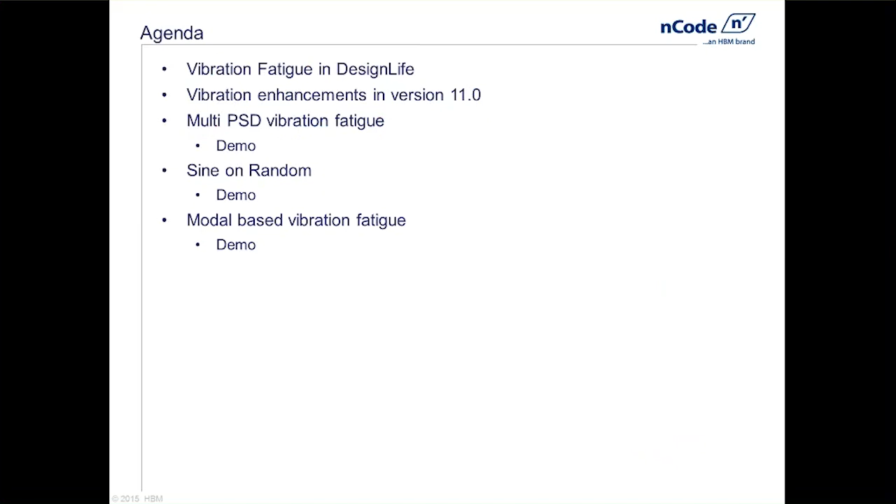The agenda today goes as follows. We're going to take a brief look into some of the functionality that we've had available to us in DesignLife up until version 11. Then we'll look at some of the enhancements in this year's version, including the ability to do multiple PSD vibration fatigue, which will include a demonstration. We'll talk a little about some of the features in Sine on Random, and then lastly do a section on modal-based vibration fatigue, also followed by a demonstration, wrapping things up with a conclusion at the end.

Just to recap, for those of you who may not be as familiar with vibration fatigue products in DesignLife, what it essentially does is allow you to simulate a vibration fatigue test. This can be driven by random PSD or swept sine loading, which are pretty common types of loading, or ways to describe our loading. The finite element model will be represented with a frequency response function.

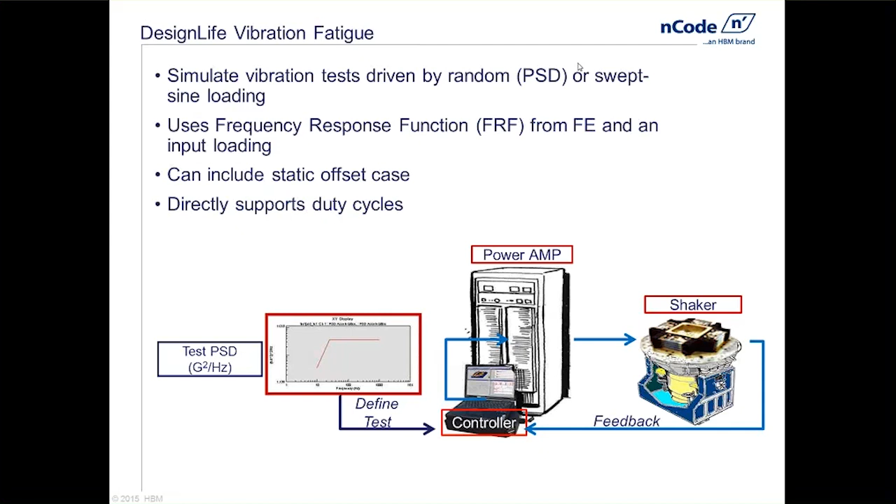We have a couple of options where we're able to include a static offset. This might be something simulating bolt tightening, assembly loads, gravitational effects, and those would then be superimposed on top of the cyclic loads, which are caused by the vibrations.

We also have the ability to build duty cycles, so we can have essentially multiple events describing different types of vibration events that would then happen sequentially, and we can put repeats on any of those events inside the duty cycle to describe the duration of each one of those individual events.

As you can see on the screen, in the middle we have a box which essentially represents what DesignLife is going to do virtually in terms of a virtual shaker table. We're going to provide at a minimum three inputs. Those main inputs are going to be the frequency response that you've solved for in FE. We accept a wide range of different solutions from FE codes.

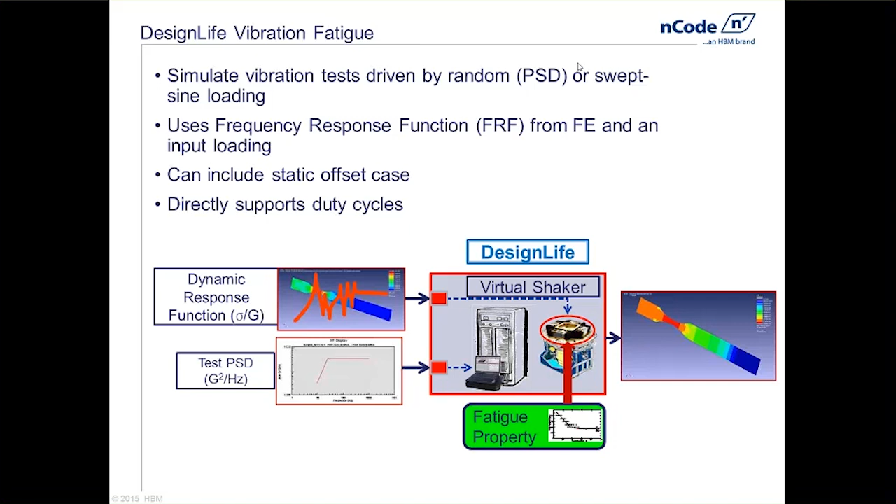You're going to be describing the loading environment. In this particular screen capture, we've got a PSD, which would oftentimes be in units of G squared per hertz or something fairly similar. And then we're going to describe the fatigue properties, in this case being a stress life-based model. From that, we'll be able to generate damage results as well as some statistical results from the vibration fatigue analysis.

So some new things in version 11. Let's take a look at these. We have quite a few new loading methods, including multiple PSDs, sine on random, and sine-dwell. We've also added functionality where we can do modal superposition in the frequency domain.

This can have huge benefits when dealing with very large models. We can much more efficiently manage modal stresses and then the modal participations, many times taking far less disk space than if we had done the frequency response function entirely in FE, solving from many frequencies. We also now have the ability to do isothermal analysis.

So in addition to being able to add static offsets, and these, by the way, are now scalable, we can also add scalable temperature load cases. So if you have material properties with different fatigue properties described at different temperatures, and a scenario with thermal conditions, we can take that into account and apply the appropriate material properties.

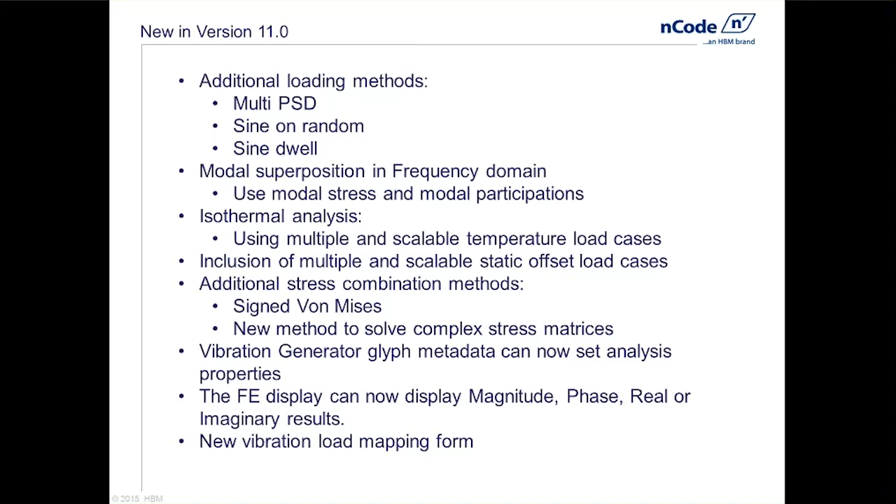In the FE display glyph, we can now display magnitude, phase, real, and imaginary results. We also have a new interface for the load mapping, which we'll see in just a bit. So let's take a look first at the multi-PSDs.

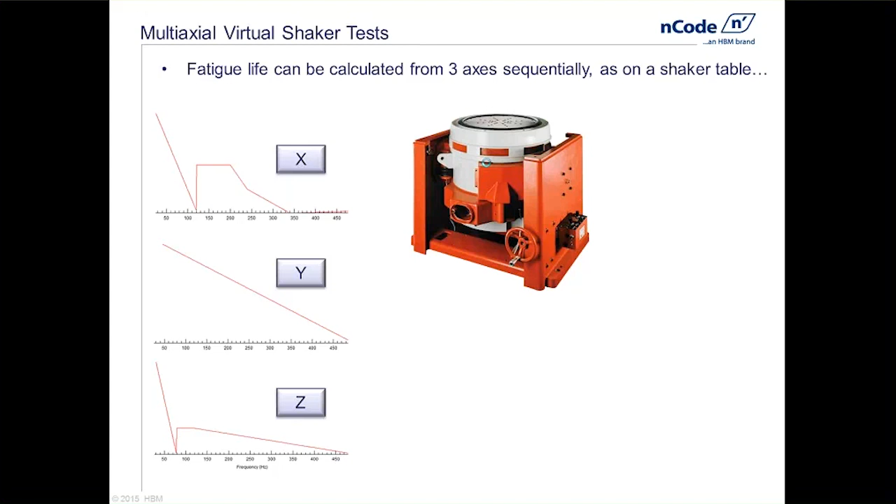For multi-PSDs, it says 3 axes sequentially here, but it doesn't have to be 3. It really just means more than one. In the past, the capability we had available, if we wanted to do multiple axes, was to do them sequentially, essentially one at a time, building a duty cycle that would excite, in this example, the X, then the Y, then the Z. This is really just what a single axis shaker table could do physically, where we might reposition the parts to address the different axes. What we now have is the capability of exciting all 3 of these axes simultaneously.

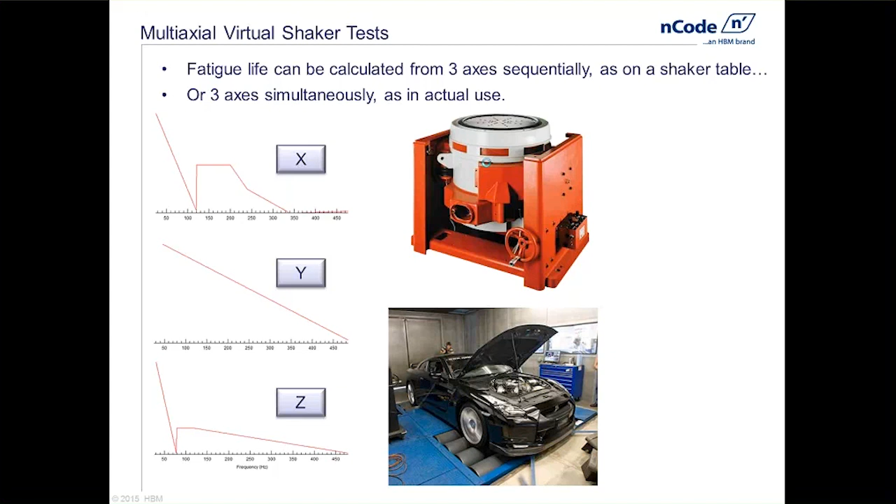This would be more realistic in terms of what a part might see out in application or in the field. You can imagine, like in this screen capture, we might have some underhood components, some electronics, mounted on a bracket on or near the engine. That's going to be excited in all 3 directions simultaneously, not sequentially, and having the capability to do this virtually is going to be far more realistic in describing the type of durability issues that component might have out in the real world.

So let's talk a little bit about what is in the load history. If we start first with some time series data, we have 4 main characteristics in that time signal. The first is amplitude, and this is very critical for doing any kind of fatigue analysis. It's essentially what allows you to describe how big a stress cycle or load cycle is going to be, which ultimately translates into some type of damage result.

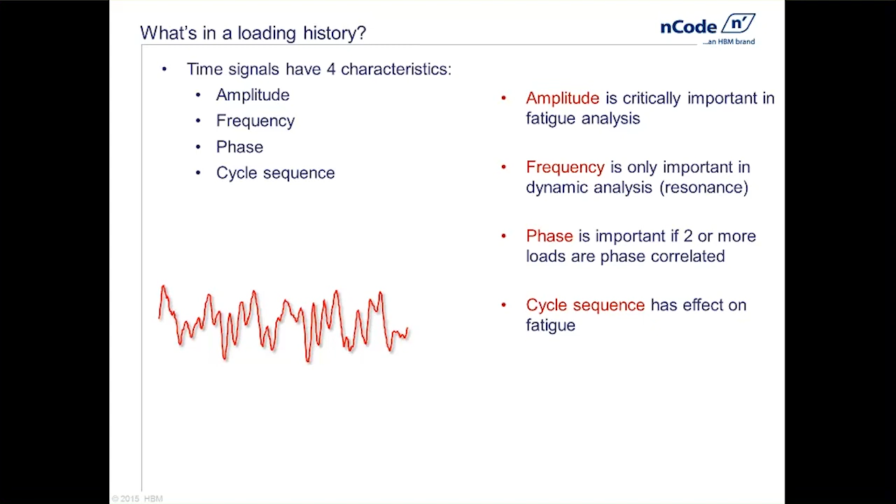We have frequency as a characteristic as well, and this one is interesting in that it's only important in dynamic analysis when we have a structure that we expect is going to resonate because of the vibration loads being applied to it. We have phase, which really only becomes important if we have more than one load. If we just have a single load, we don't have to describe how it relates to other things, so phase isn't as big an issue, but getting into multi-PSDs it becomes very important. And lastly we have cycle sequence, which can have an effect on fatigue.

So when we convert time series data to the frequency domain, we often make use of a Fourier transform, where we can describe a time signal with a series of sine waves. In this example, it's fairly discrete, where we've taken a time history and represented it with just a series of 4 sine waves, each having a unique amplitude and a unique frequency.

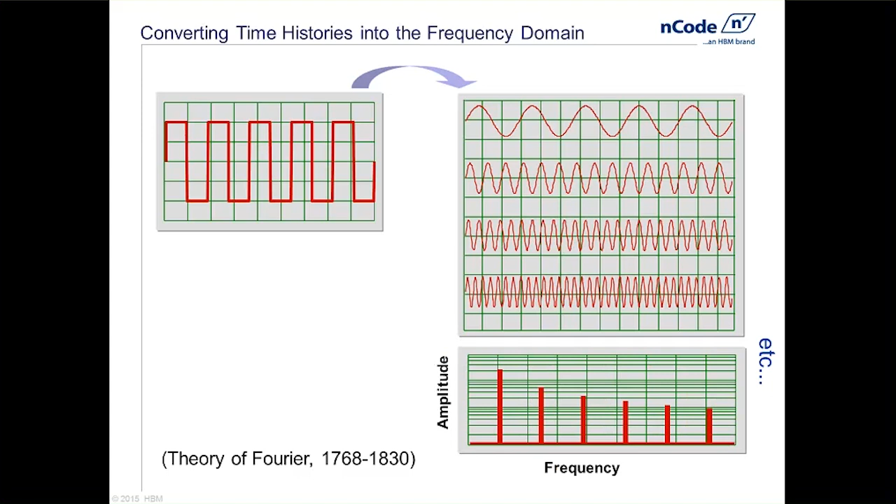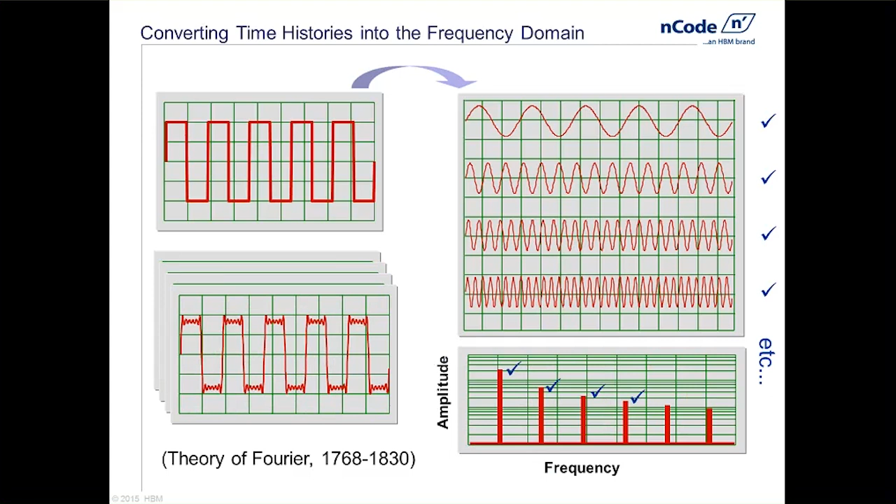Often we plot that on a chart that would allow us to display amplitude or power versus frequency. Perhaps we can reconstruct that time series data if need be from the information described in the PSD, overlaying more and more of these decomposed sine waves to get a pretty good approximation of the original time series data. As a reminder, this works really well, and this is all we need to do if we have a single load case or a single load PSD.

It becomes a bit more complicated when we have multiple events, and we're going to see a couple of examples here where this importance really starts to show.

If we look at a simple example of a couple of flags on a flagpole, both fairly close to one another, fairly high up on the flagpole, we might say the events - being wind conditions on each flag - could be fully correlated if they really are seeing the same type of conditions. If we look at the second example, where we have two flags again but one has been lowered, it might be that the lower one is starting to get into the boundary layer caused by wind conditions closer to the ground. That event is going to start to look a bit more different than the event closer to the top of the flagpole, and now we're getting into a scenario where we don't have complete correlation between those events.

We would say that they're partially correlated, or there's definitely some similarity between the time signals, but they're not exactly alike.

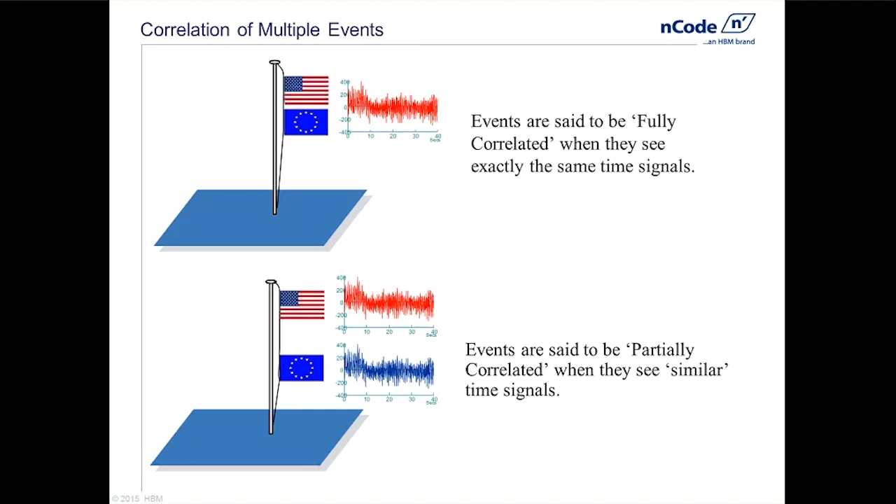We can look at it another way as well. If we have two flags on two separate flagpoles spaced some distance apart, they would be partially correlated, primarily because there'd be some type of a phase shift. You have some event that occurs on the leftmost flagpole, and then moments later that same event occurs on the next flagpole.

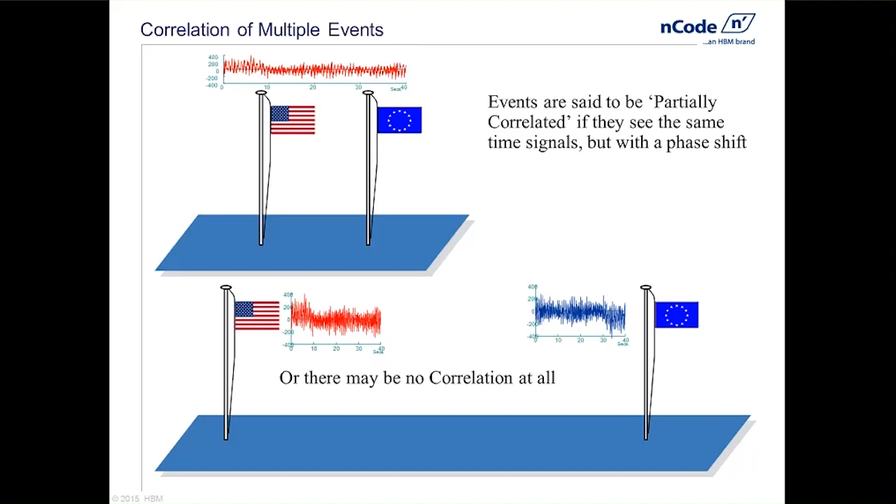Or we could have no correlation at all. If we've spaced those two flagpoles far enough apart, or if one of those was much lower on the second flagpole, the time histories that we're going to see are going to be completely different. And we need to be able to describe how well these correlate. That's what we're going to be seeing in this next particular slide.

So just to recap, if we are fortunate enough where we only have one load PSD, what we can do is, if we are starting with time series data, do a Fourier transform, describe our loading in terms of something like g squared per hertz, and we can see we've got a sample plot right here. We're going to apply this load PSD to our frequency response function, one that we've solved for in FE with unit excitation across all frequencies.

By applying this load PSD to the frequency response function here, we can generate a local response PSD for each element on that structure. So now we end up getting a plot for each element that is going to be some type of stress PSD. We're going to have stress as a function of frequency, and then we can make use of counting algorithms such as Lalanne or Dirlik to determine the cyclic content within this stress PSD, and then we can use Miner's rule to determine how much damage is caused.

Now, if we have two loads, or two load PSDs, there is going to be a relationship between these two. How well are they correlating? Kind of like what we saw in those previous slides. To describe this correlation, we also need to have a cross spectra and phase. This is going to help us to determine at a given frequency how much is one load PSD being excited and how much is the other one in terms of gain with respect to that one, and what is the phase? Are they together, or is there a little bit of a lag?

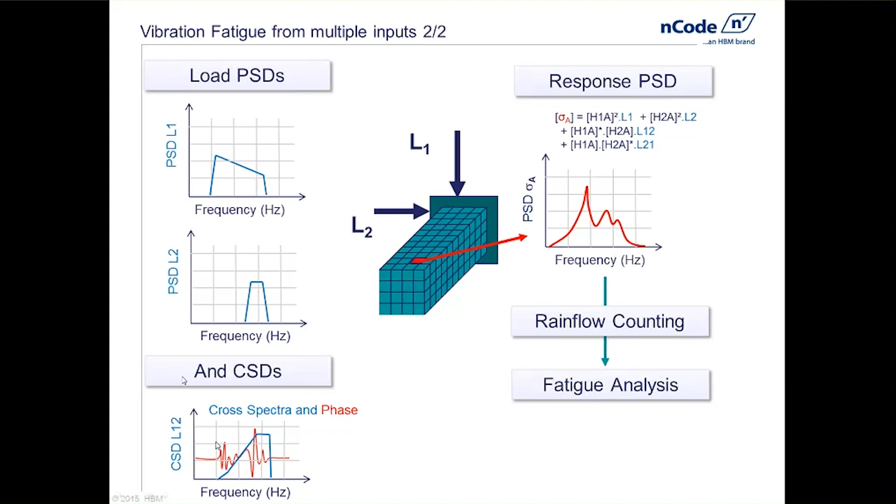With these two load PSDs and the cross spectra, we can come up with a stress PSD on each of the elements in the frequency response function. And once we have this stress PSD, again, it's just going to be a matter of using a cycle counting algorithm to determine the cyclic content here, and we can do our fatigue calculations. But the complexity definitely is in combining these multiple load PSDs together.

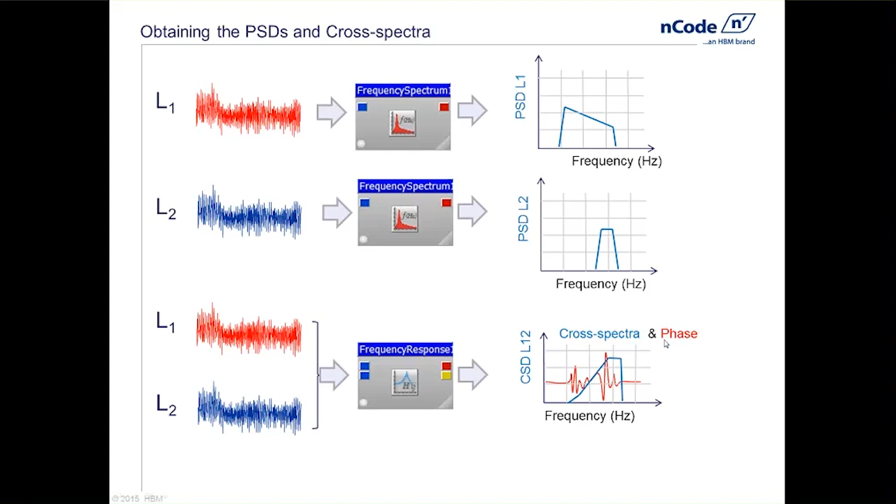Within nCode, the PSDs can be easily created with a frequency spectrum glyph. We can see that right here, and we're going to see a demonstration of this in just a moment. And the frequency response glyph right here is what will allow us to create the cross spectra and the phase plots. So let me go ahead and open up nCode for you.

What I'm going to do is open up a standard flow. This is something that's going to be available to all users. And what it will do is create the PSDs necessary, as well as the cross spectra with phase. It creates one more file, which really serves as a lookup file. It's a text-based file, fairly easy to read. That becomes really helpful. It's a nice user feature when we get ready to do fatigue calculations in design life with these PSDs and these cross spectrums.

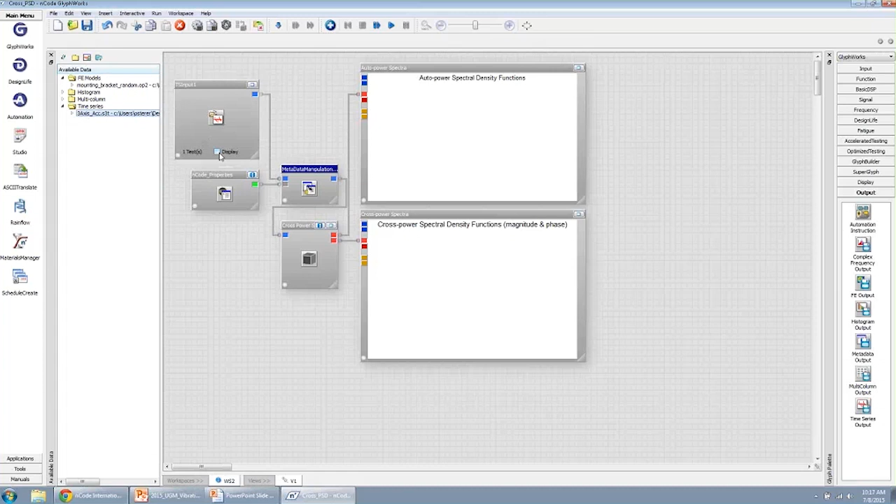Let me go ahead and open up this first process right here. It's called cross PSD. And what I will do is take my time series data, drag it into this time series input glyph. It's going to be one of the inputs required. This particular glyph right here, this is just going to allow me to specify the number of bins in my frequency analysis. And we want to make sure that that's consistent across my PSDs as well as my cross spectras.

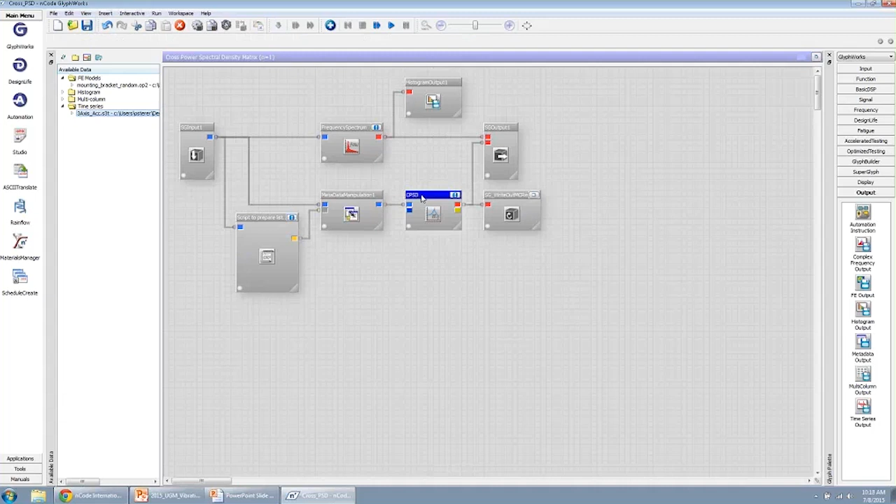If I go ahead and maximize this particular glyph right here, it's a super glyph. You'll see that within it, it contains a frequency spectrum glyph, and it also contains a CPSD glyph. Both of those will be generating the necessary plots in the frequency domain that we need to perform a fatigue analysis on an FE model with multiple load PSDs.

So let me go ahead and just hit the run button here. We'll take a quick look at the plots and then resume back into our PowerPoint presentation. So here we have the very first XY display.

This is just showing us our PSDs in each of the 3 directions. We could use each one of these alone by itself if we were trying to do a single axis shaker table where we're looking at them sequentially.

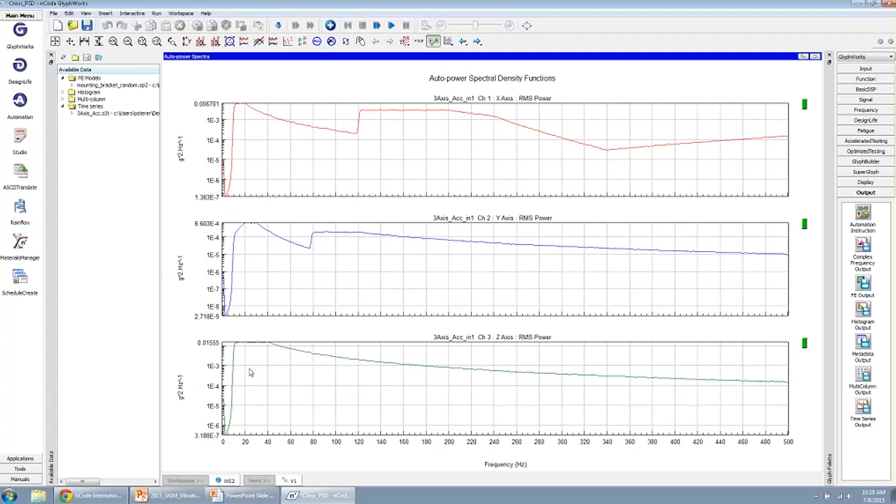But because we've used this particular process, down below right here, we also have the cross spectrum and the phase of channel 1 versus 2. And I can index through some of these as well. We can see how channel 1 and 3 relate. And we have channels 2 and 1, channels 2 and 3, and then channels 3 and 1. So we have all of the cross spectra and the phase as well.

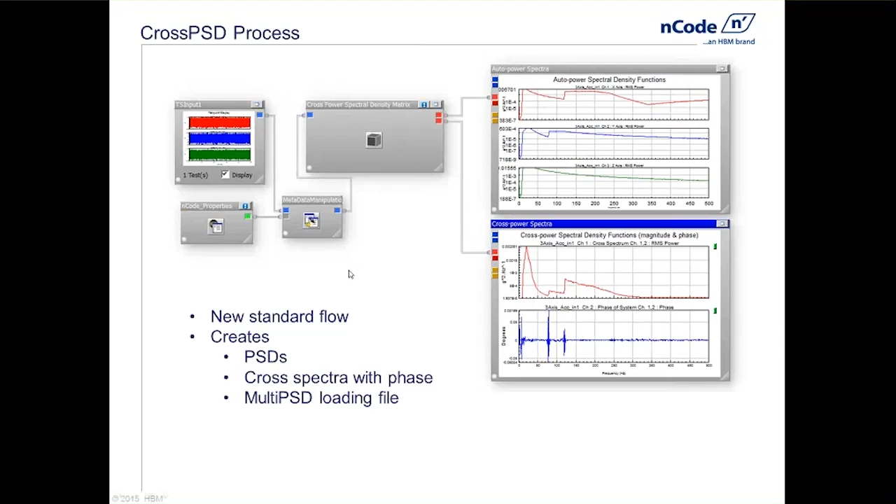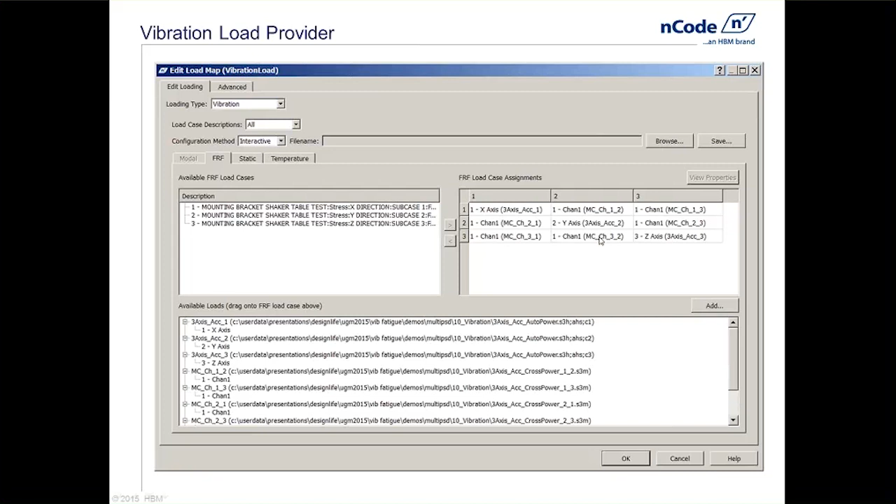The XML file, or that text file that gets generated, if I browse with this button right here, I can actually navigate directly to that particular text file that was automatically generated in the previous process, and it would automatically populate all the correct plots in this square matrix. So you as a user are not required to drag and drop each individual one here. You can simply select that one file and it would auto-populate the matrix for you.

So at this point, what I'd like to do is jump back into nCode and just give you a brief demo of the remainder of this vibration fatigue for multiple inputs. And to do that, I'm going to open up one more process. That is this one right here. It's already set up for me.

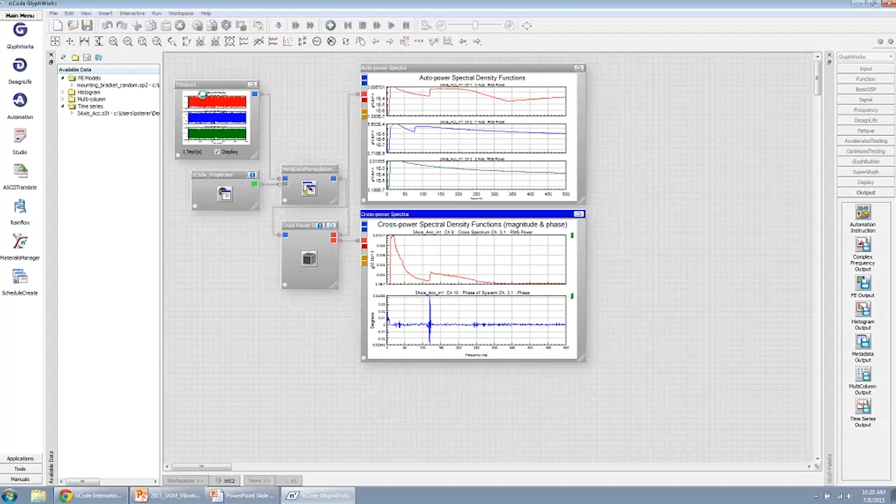And what I need to do is grab my FE results. If I show you just a few of the results in this particular results file, underneath this drop-down menu, under the properties, you'll see that for subcase 1, and that's the X direction, we have solutions in 10 Hertz increments, starting at 10 Hertz, and if I scroll down slowly here, you'll see that we go all the way up to 500 Hertz.

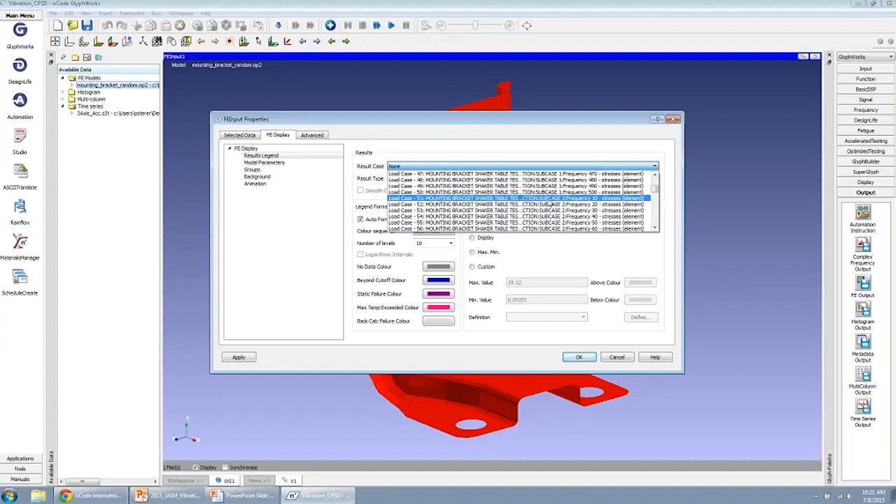We then start up with subcase 2, which is the Y direction, again 10 Hertz increments, and that would then be followed with subcase 3, which would be the Z direction. So we've got a solution for many frequencies in each of the three directions.

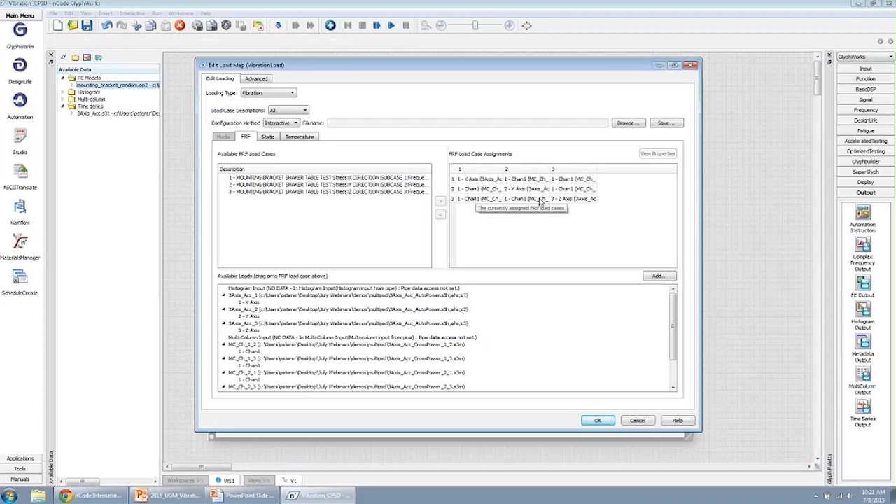If I go into the load mapper, just to show you guys what this looks like, you can see that we have already populated this square matrix of all of our assignments. The browse button right here, if I click on that one, you can see this is that text file that would automatically build that matrix for me. It has however, already been selected, so there's really no need to define that one more time.

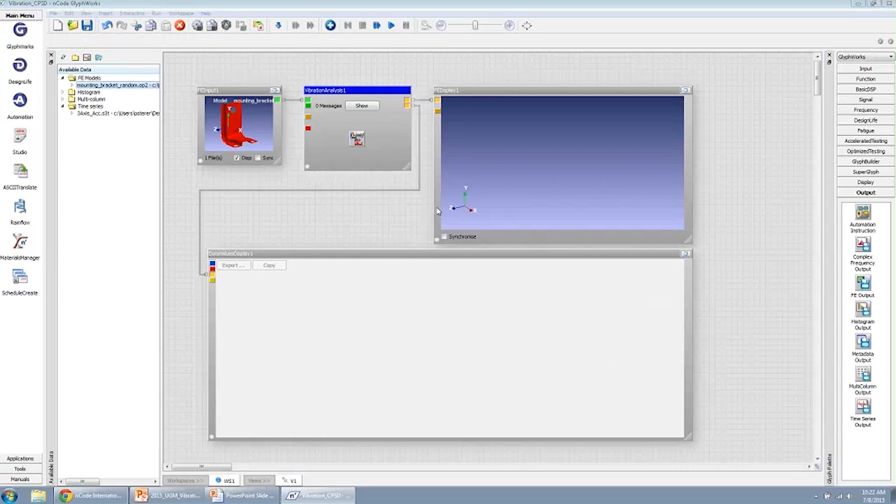And just to make sure that we have assigned a material to it, we'll take a look, and we have in fact just assigned a generic aluminum alloy to this particular bracket. So we are in fact ready to run it, and by clicking on the run button, we'll do a stress translation, and then count up cycles for all of the entities in my bracket, and then output some damage results.

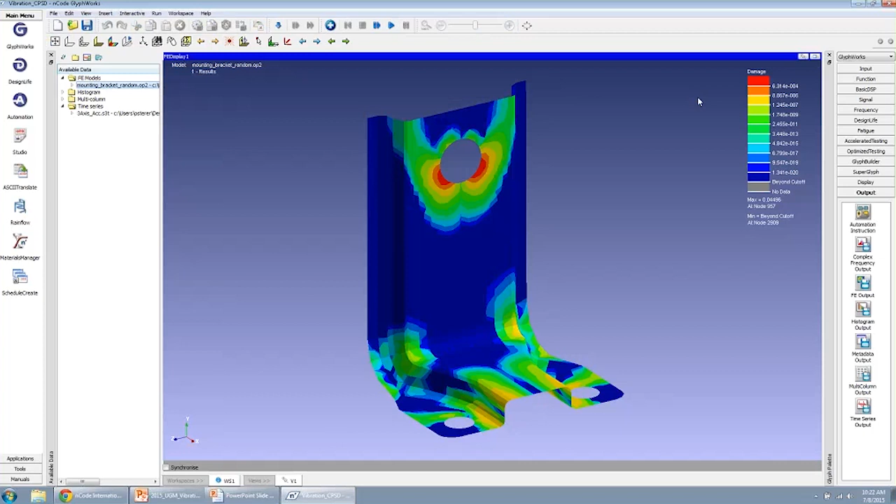So this right here, if I enlarge the FE display glyph, we can now see a damage contour plot. That same information is also being displayed in tabular format in this display glyph down here as well, in our data value display. We have in fact added some additional columns to the results that we can look at.

Some of them might be a bit easier to look at in tabular format. But if I scroll a little to the right, we will notice right away that we have columns for all of our spectral moments. These are some of the numerical values used to determine the cyclic content with some of the counting methods. And we have a little bit further down here, life in the very last column. So quite a number of different statistical results that get outputted when doing vibration fatigue, because the counting methods are assuming some type of a statistical distribution of cycle sizes.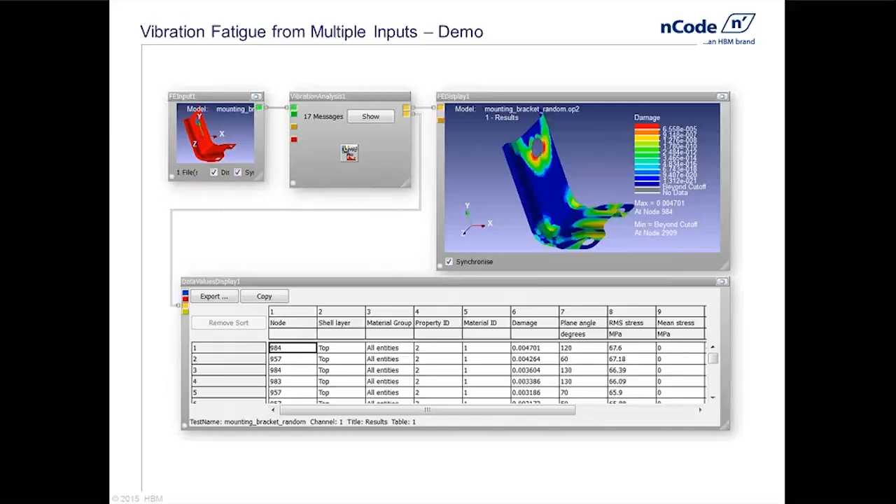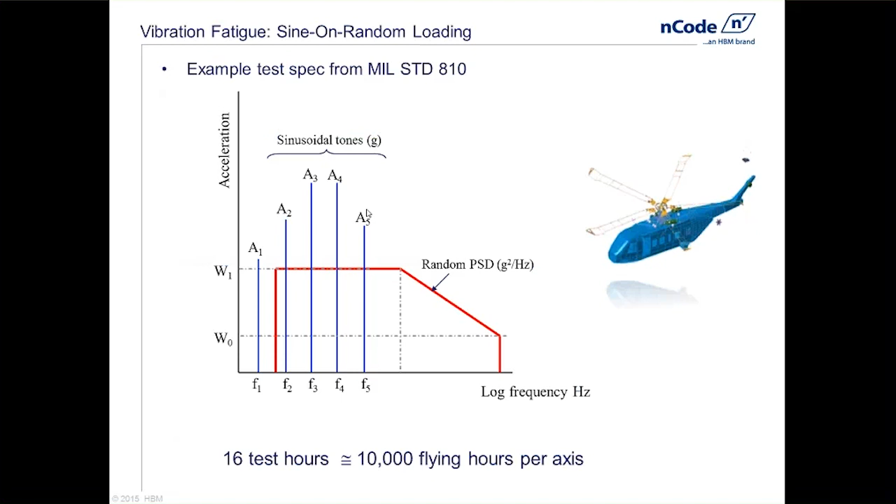All right, let's go ahead and go back into the PowerPoint presentation, go to the next section. The next section is sine on random. And what we've really done here is introduced a new way in which we can describe the loading. In this case, the loading is going to be some type of a random PSD. We can see that in red right here, overlaid with one or multiple sine tones. An example of this would be like the MIL Standard 810 handbook with a sine on random loading.

We have a couple of assumptions that we should take into consideration when doing sine on random. The first one is that the stress response must be narrow band. And just to be clear, this isn't the load PSD, whether it's narrow band or broadband, but the actual local stress response on your structure. So if you're looking at a particular element, what is the stress response of that particular element in the frequency domain? Is it narrow band? If it is not narrow band, if it's broadband, and we're making a narrow band assumption, we tend to make very conservative damage estimates. So if it's not narrow band, at least it's going in the right direction in terms of a conservative solution. The second bullet item is that the sine frequencies must be completely within the noise frequencies.

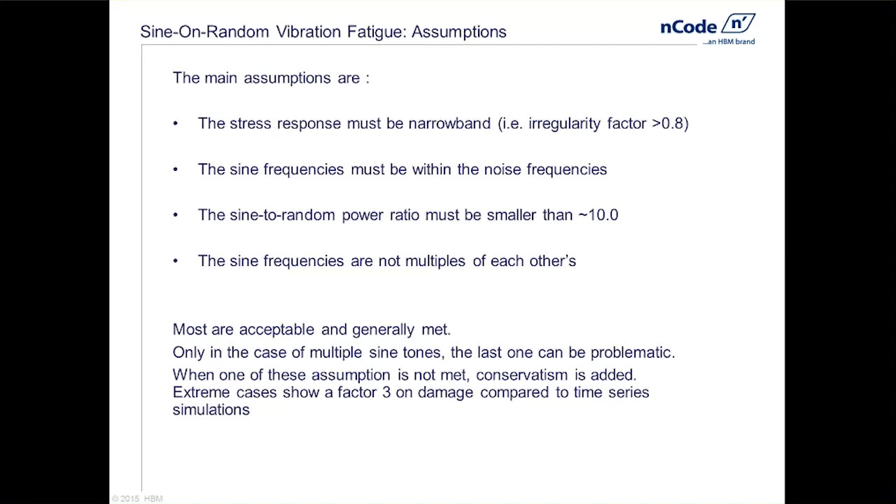And this one is usually something that the controllers prevent you from doing anyway, so it's often not a problem. The third bullet item is that the sine to random power ratio must be smaller than 10. If not, again, we're going to start to see some conservative damage estimates. And then lastly, in the event that we have multiple sine tones, the sine frequencies should not be multiples of each other.

So let's go ahead and go back into nCode. I'm going to navigate to a different directory to get some sample data for you guys. So let's go ahead and clear out my available data window and grab this particular directory here. And I have a sample process we can start with as well.

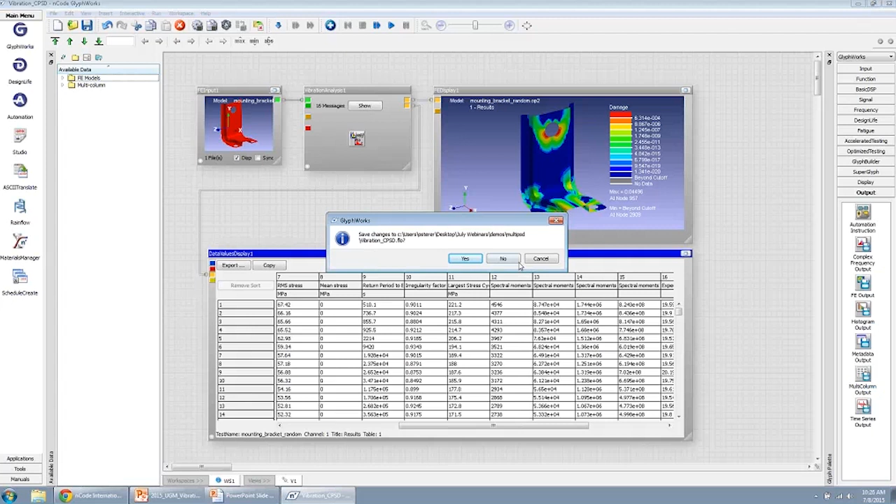All right, so in this particular process, what I'm going to do is grab my FE results. This again is a bracket, a little bit of a different bracket than what we saw in the previous example. I'm going to grab my PSD right here, drag it into this multi-column input glyph. This multi-column input glyph will be passing along the random bit of my excitation or my load into the vibration generator, and we can go ahead and take a look in here.

You can see here are the breakpoints from my multi-column input glyph. And if I go to this Advanced tab, you can see that we have described in metadata the sine tones that are to be overlaid. In this case, we only have one sine tone. It's going to be at 90 Hertz, and it has an amplitude of 0.2.

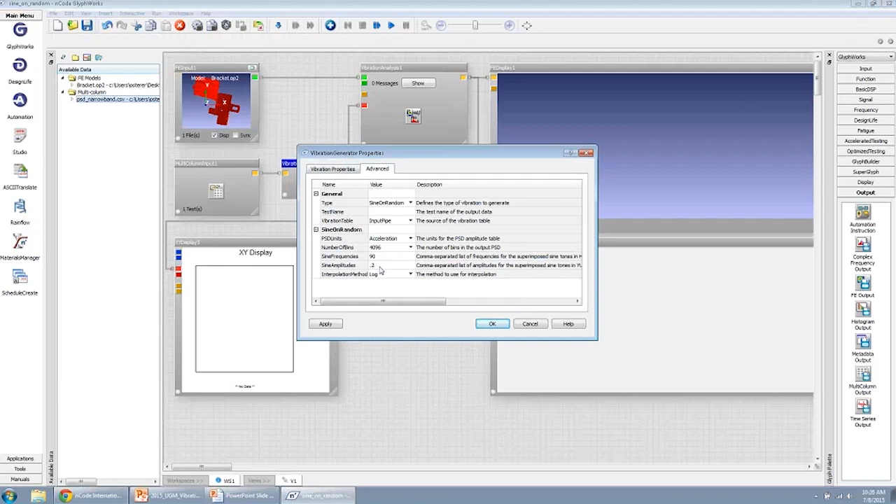So we will OK that, and if we just double-click on our glyph, go into material mapping, make sure that we have assigned a material to our structure. And we have. It has an aluminum alloy. That's good. We should be able to run the process.

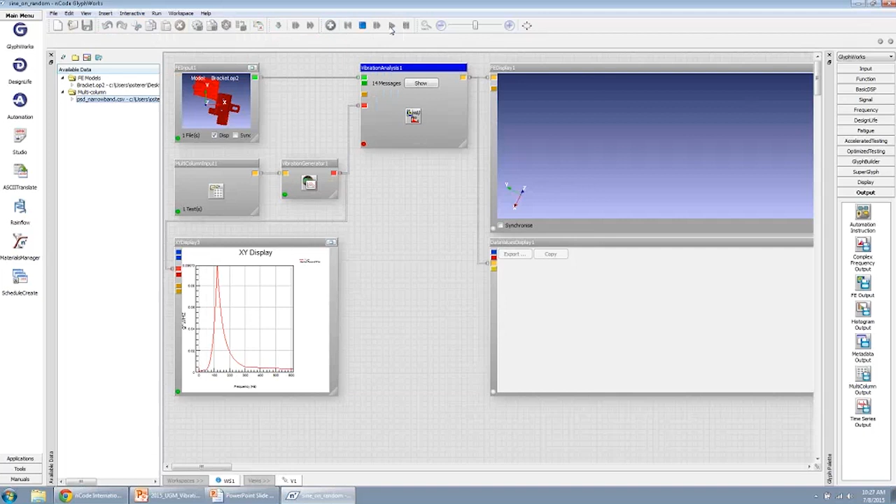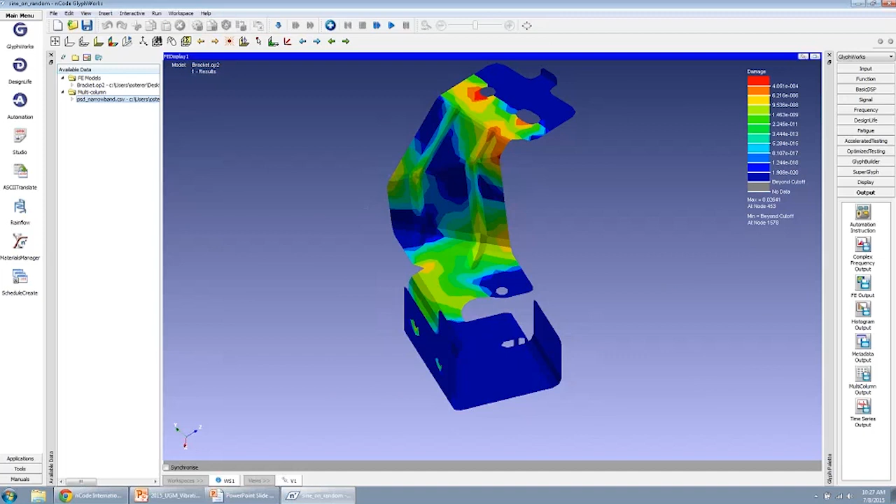And there we go. We now have a damage contour plot. If I scroll a little bit to the right, we can see that we have predicted some damage results on this particular bracket based on random excitations with one sine tone. And in addition to that, we can look at some tabular results.

And probably one of the newer columns in this one is the power ratio. So this is the power ratio of your sine tone to the random. And looking at some of these results and determining if that's less than 10 or not is going to tell you if you might expect some conservative results on a node-by-node basis.

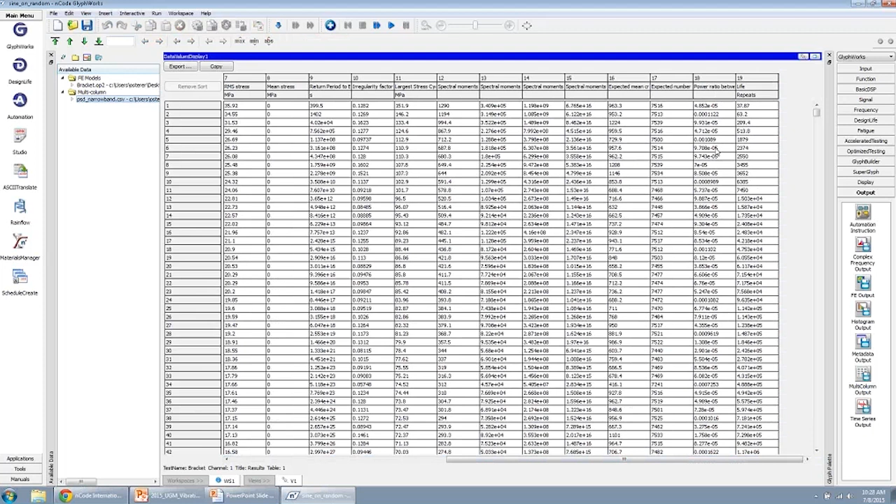All right, so that is the sine on random loading. Let's go ahead and go into the final section, which is modal superposition based on our frequency response function.

So just to graphically display what the inputs would be, if we're doing a fatigue analysis on a frequency response model prior to nCode 11, we needed to do a harmonic analysis in FE. And if you were doing this in Nastran, for example, you would have results in the form of an OP2 file representing your complex frequency response function.

And we would bring this particular results file into Design Life, applying a PSD to that if we had random excitations, and then determining the damage as a result of that. This could be a very large model.

A different way of doing this would be to do a modal analysis in FE. We could take the modal stresses, and then we could take the modal coordinates, which is going to be in the form of a PCH file, the combination of the two being much smaller in terms of disk space than the original approach, but describing the same types of things, and then allowing Design Life to essentially build the frequency response function. So we're going to do this inside of Design Life.

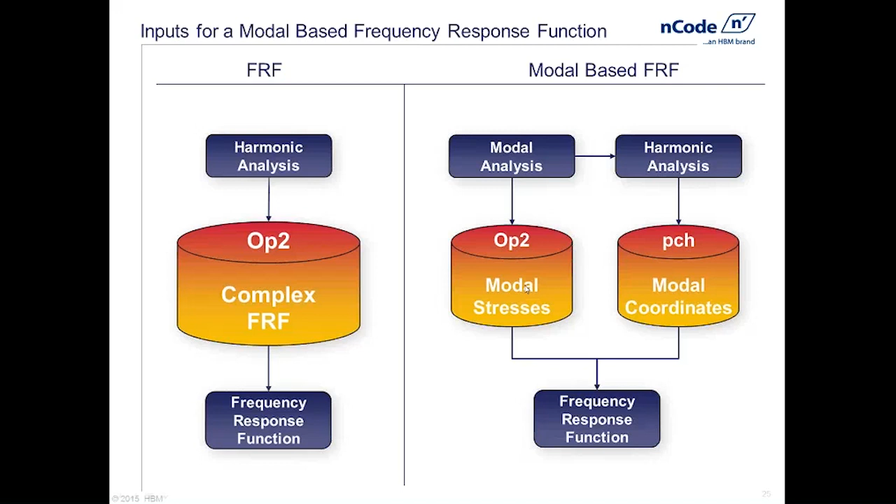And the example that I'm going to show you in a bit, the size of these two files combined is 1/20th the size of this particular example right here with the original approach.

Here you can see a table that describes the benefits of doing a modal-based frequency response function. If we looked at just one particular 2D element where we had 200 frequency steps and also 10 mode shapes, if we took the original approach, we have a real and an imaginary stress.

Each one of those stresses has 3 tensors. And for the first approach, we have 200 frequency steps, which gives us 1,200 stress results per element in that FE results file.

If we took a modal-based approach, again, we have 1 real and 1 imaginary stress component, 3 tensors each, but only 10 mode shapes, which gives us far fewer stress results per element that we need to address. And this is really what's going to allow us to dramatically reduce the file size of the FE results files, and also dramatically decrease the computation time of the analysis itself.

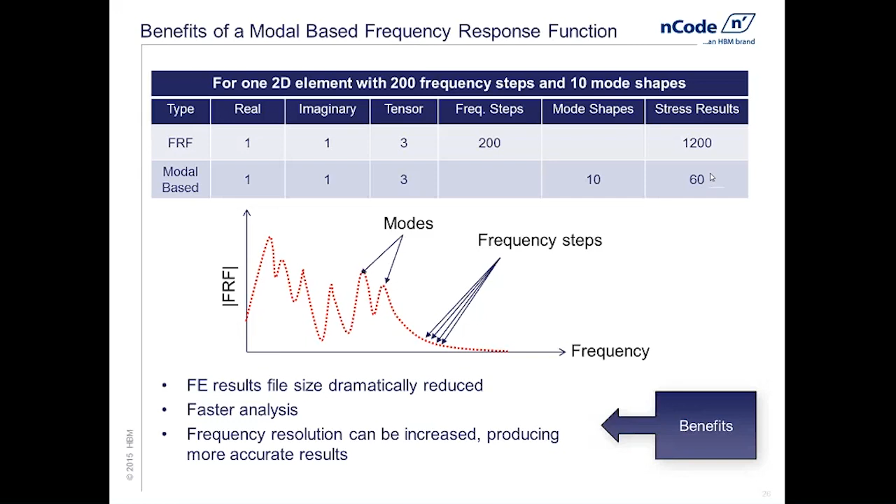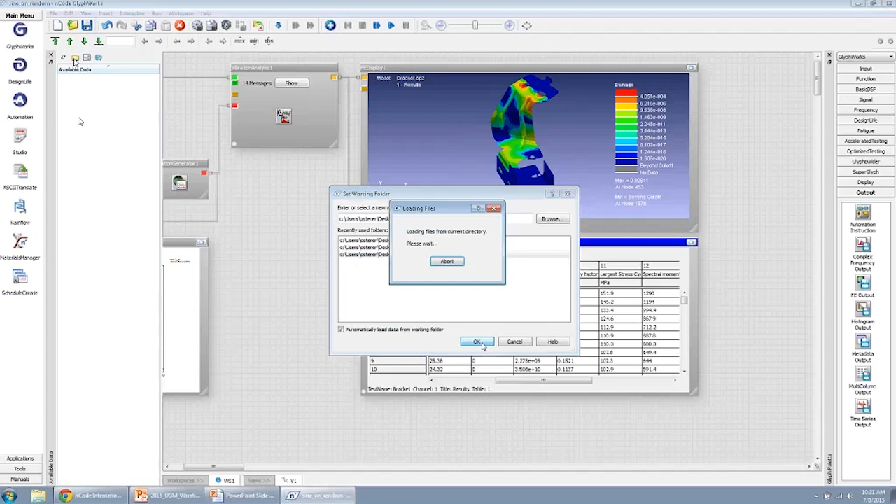So let's take a look here, let me go ahead and show you the process. And for this one, I'm actually going to navigate to a different directory for some sample data. But what I will do is build this particular process from scratch, just so that you can see some of the properties that are required, some of the things that we need to change as we build this particular analysis.

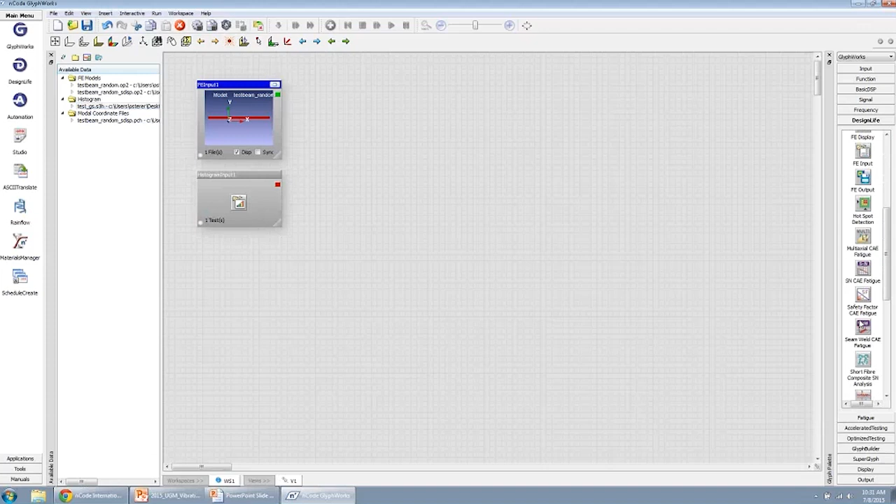So what I'm going to do is grab my modal stresses in the form of an OP2 file. I'm going to grab my PSD. This is in histogram format. And then my modal coordinates, so here's my PCH file. That actually needs to be dropped onto a modal coordinate input glyph.

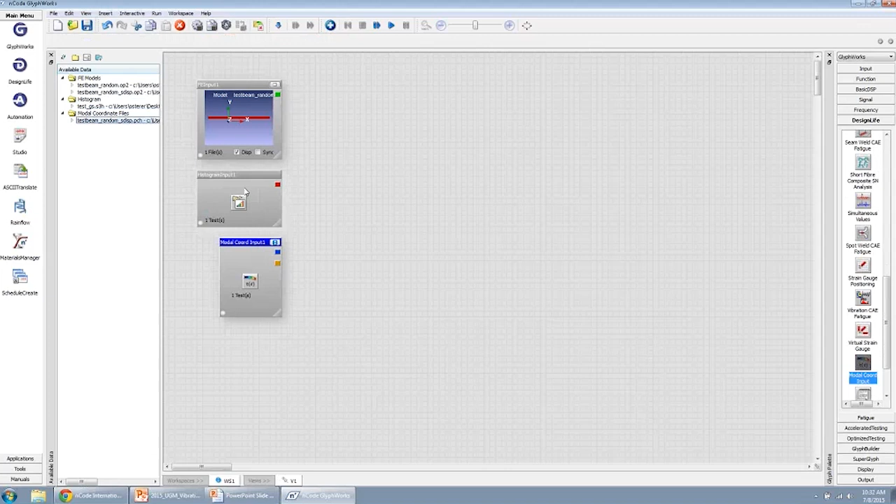So let's bring that out onto the workspace. There we go. So the PCH file and the OP2 file, those are both coming from FE, representing my modal stresses and my modal coordinates. And this particular histogram file, that may be something that you had created earlier in nCode, or perhaps somebody has supplied with you. We're going to combine all of those into our vibration analysis glyph.

So let me go ahead and attach some pipes here. And in this particular example, I'm going to make use of this red histogram pad for my PSD, and I'm going to make use of this multi-column pad for my modal coordinates.

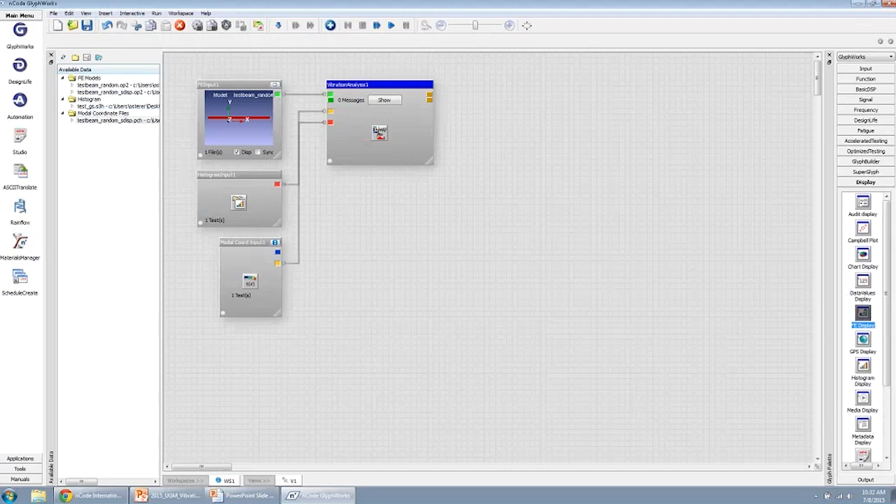We'll get one more display out onto, looks like I can get two displays out onto this workspace for you. We'll have some FE display results there, and we can also graphically display the histogram, the PSD, and we could also display the modal coordinates if we were interested in looking at some of those.

All right, so what I want to do, I'm going to go into something called Advanced Edit on the Vibration Analysis glyph. We will run the process up to this point.

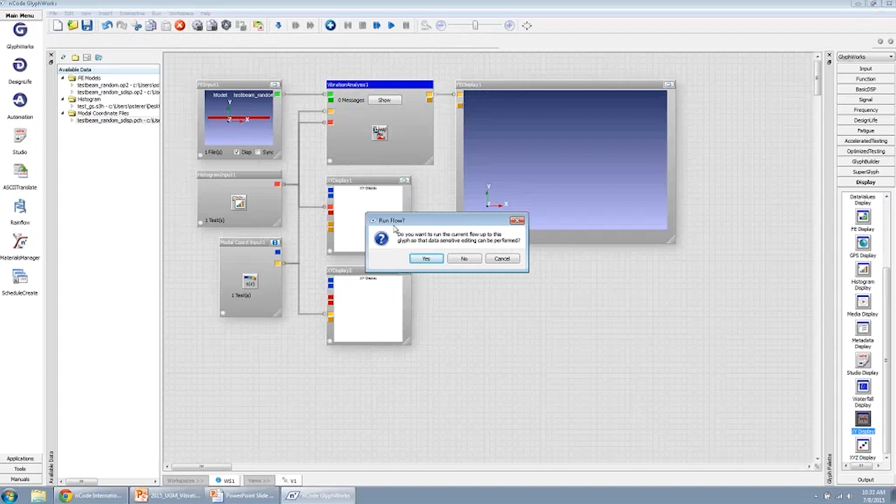And now what I'm going to do is go down my tree structure over on the left and define some of the properties that are required to be able to do vibration fatigue based on the modal stresses. The first thing that we need to do is inside of FE results, this is the area that essentially allows us to interpret how we're going to process the FE results.

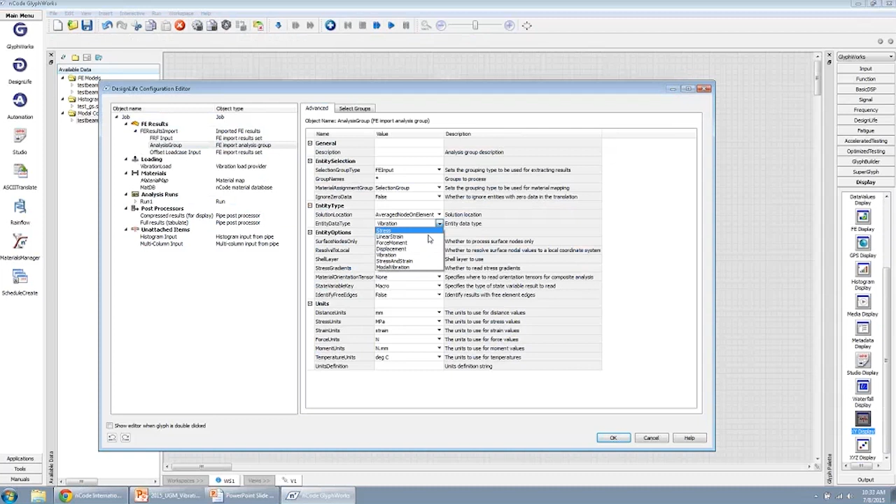I want to make sure that my entity data type is set to modal vibrations. This is the first thing that we need to ensure. That's going to allow us to grab those modal stresses.

The next thing that we'll do is describe how the vibrations will be described. And we first need to go to this Advanced tab. This Advanced tab is going to allow us to describe modal loading. That's by default set to false, but if I set it to true, it enables a tab right here called modal. So now we can see that my modal set is available.

I can select that one and move it to the right. And I can also take this piped in multi-column data, this is my PCH file, the modal coordinates, and assign it to my modal stresses.

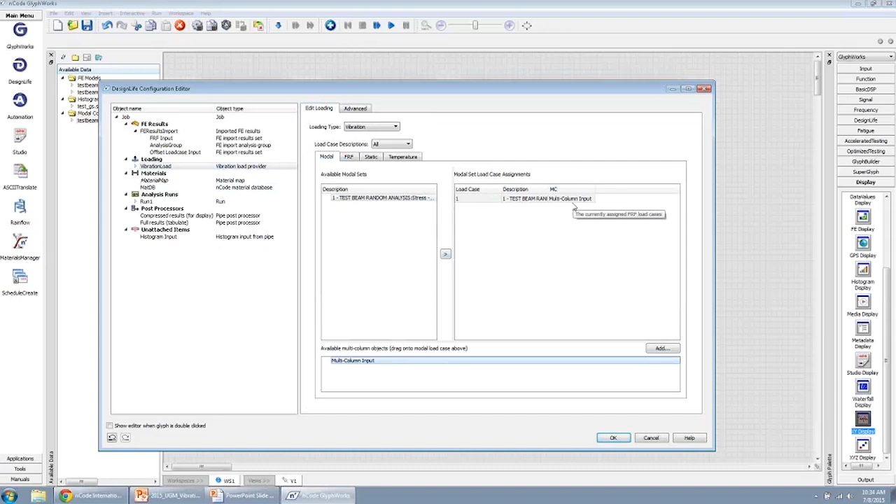By doing so, this is going to allow DesignLife to essentially build my frequency response function, which is going to be described in this tab here called FRF. I can now take that frequency response function that we're calculating, move that to the right, and I can drag my histogram on top of that. So here's my PSD, my random excitations described in histogram format.

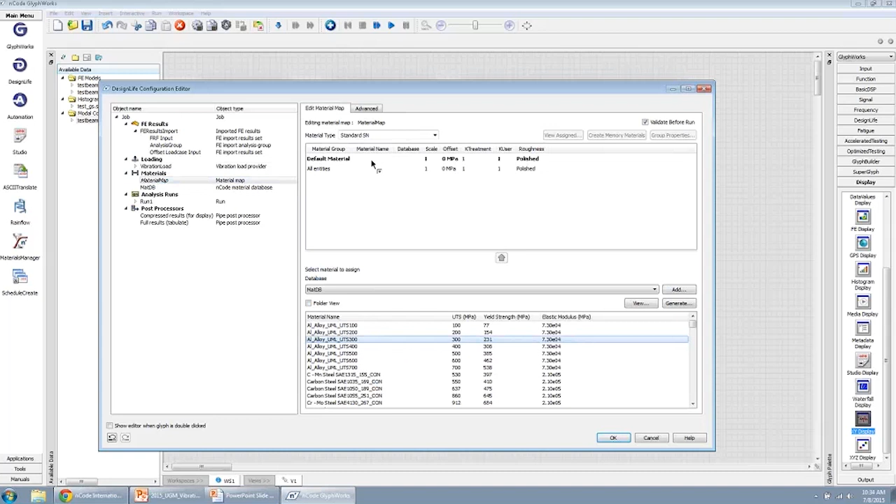We need to go a little bit further down and make sure that we have a material assigned. So we'll just grab a pretty standard material here. Let's try that one more time. There we go. And we should be ready to run our process.

So I'm going to OK all of those changes to my properties, select the Run button, and we are now performing fatigue calculations.

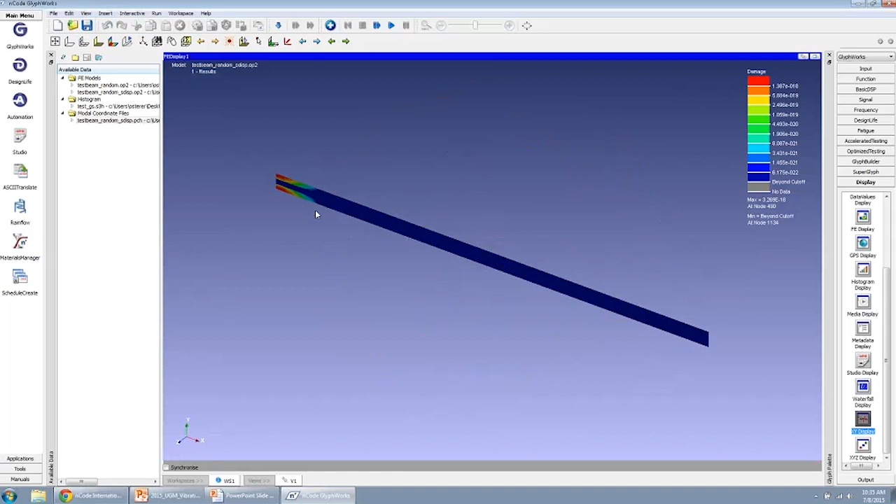So here is our damage plot. Very simple model in this particular example, but you can see that we've got a little bit of damage occurring in the upper left end of our structure.

If we look at the histogram in the first XY display glyph, perhaps we want to look at a log scale, and we can enlarge that. Here is the PSD in terms of G squared per hertz, going all the way up to 2000 hertz.

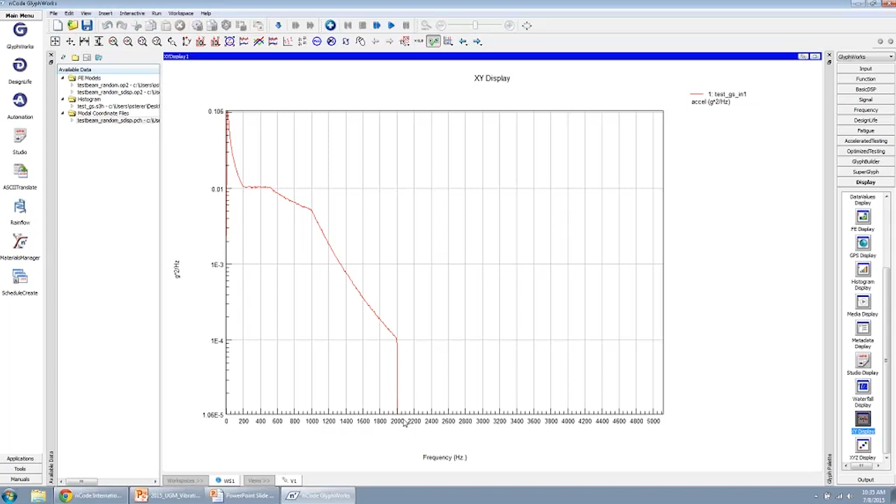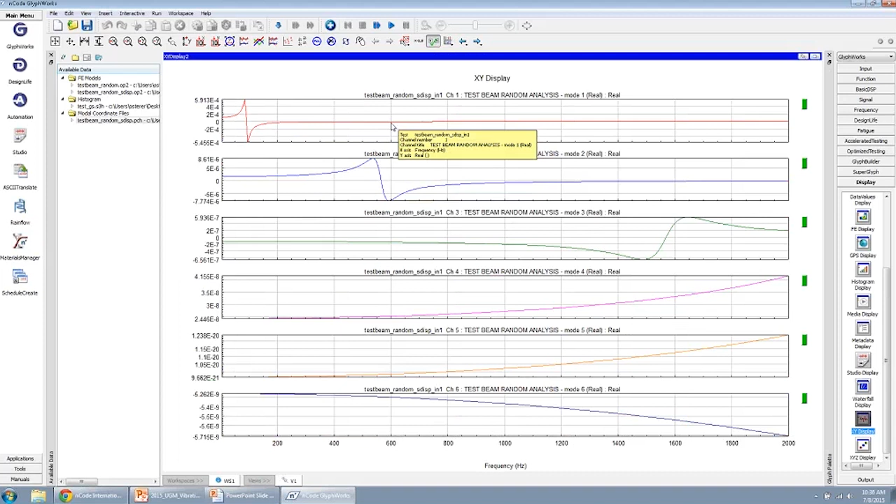And here are the first few of the modal coordinates. We're going to have a modal coordinate for each mode shape. And I believe we have 6 in this particular example, so we can set that to 6. So here are modal coordinates for the first, second, third, fourth, fifth, and sixth mode shapes with the real component. And there will also be 6 others for the imaginary component as well. So this information right here, combined with our modal stresses, is what allows us to essentially build that frequency response function in nCode.

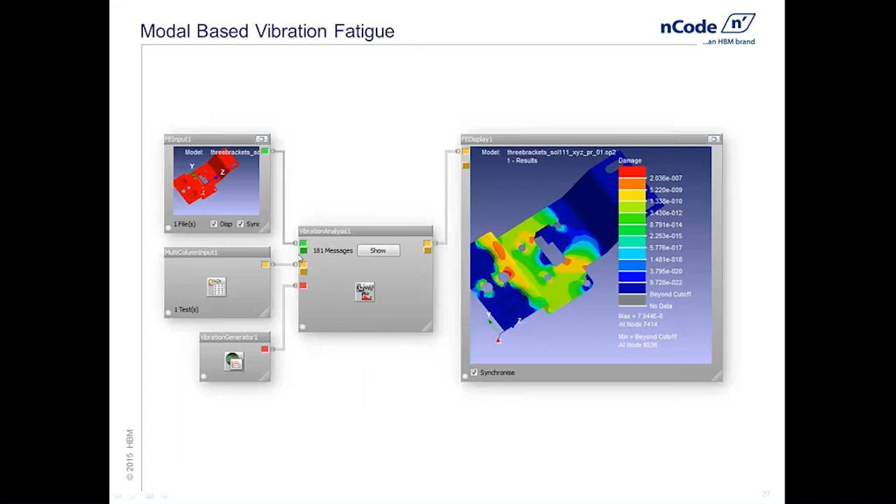All right, let's go ahead and jump back into our PowerPoint and make our way through the end of this section here. So just to kind of recap on our modal-based frequency response function, we started with modal stresses and also the modal coordinates.

Those were solved for in FE. We combined those in nCode. The modal coordinates, by the way, that particular glyph supports results from Abaqus, ANSYS, Nastran, and OptiStruct. And the big advantage here is that we are going to be dealing with much smaller files. In almost all cases, there are far fewer modes than we would typically have frequency steps, and that then translates into faster computation time.

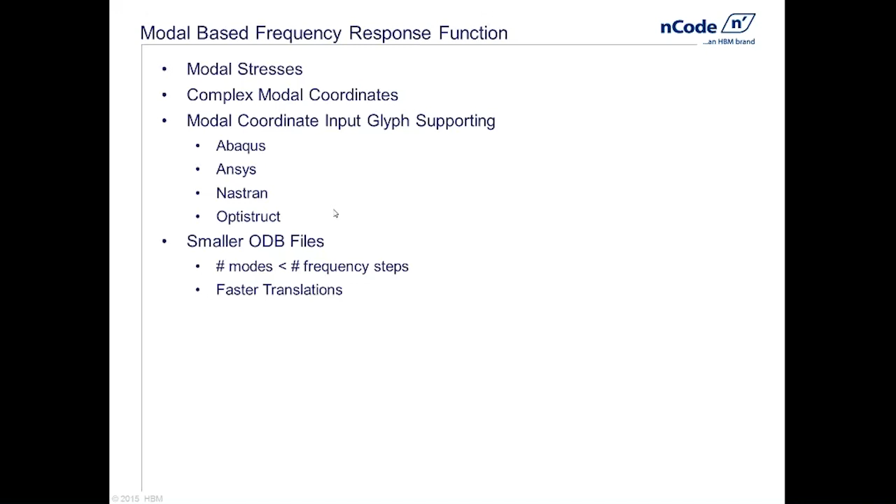And there was the demo that we saw just a moment ago. So, in summary, what we've seen here is that we've had vibration fatigue capabilities in DesignLife for quite some time. It goes actually all the way back to version 4. But with version 11, which came out early this year, we introduced quite a few new features.

The key ones being the ability to do multiple PSDs, as well as different types of loading, sine on random and sine dwell. We added the modal-based vibration fatigue, which allows us to greatly reduce file size of our results files and improve computation time.

We've enhanced the static offset. Prior to nCode 11, the static offset was as it is, but now what we can do is actually scale that static offset. It might be nice if you have a linear response, for example, on some type of assembly load or preload, and maybe you have different levels of that load. You really only have to do one analysis in FE, and then we can take advantage of scale factors inside of nCode to manipulate that further.

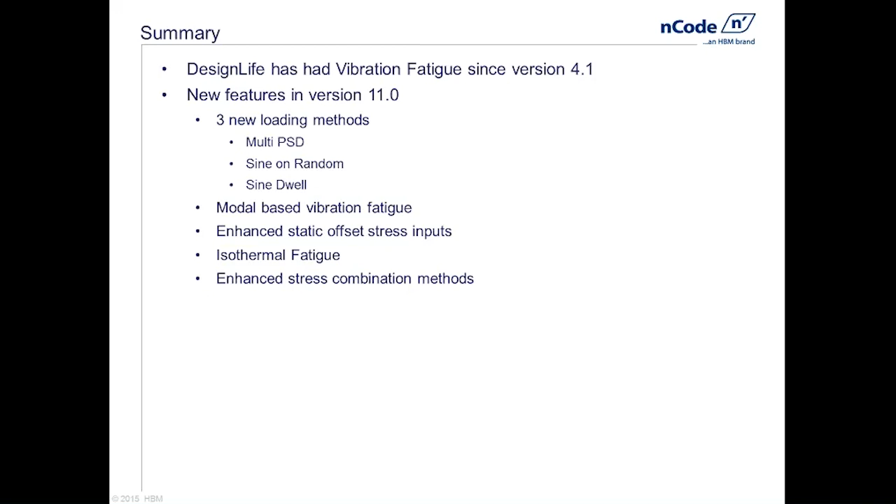Isothermal fatigue is now a possibility with vibration fatigue, and we've also enhanced some of the stress combination methods.